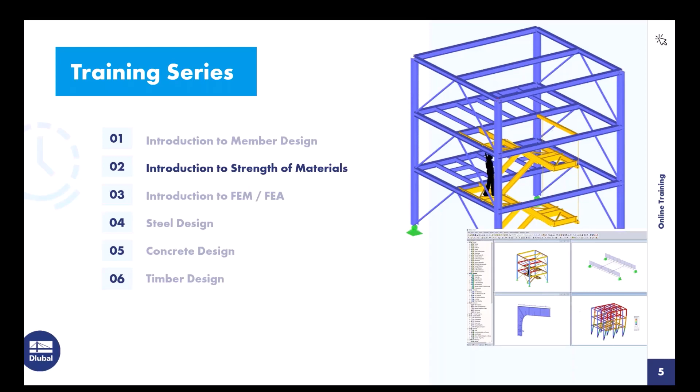This brings me to today's training program. I will first give you an introduction to the RSECTION program. Using several examples, I would like to show you the modeling options and design methods in the program. On the first example, a thin-walled I-profile is modeled with graphic functions.

I will model this slowly so that you can enter this cross-section as well. In another example, I show how to insert cross-sections from the database and how you can add other parts to these cross-sections. Then I show the modeling of a massive cross-section based on a DXF template. Finally, I model a hybrid cross-section.

First, I start a survey to find out whether strengths of materials has already been covered in your studies. I ask you to answer this now.

Okay, most of you have already got info about strengths of materials. Then I would ask you to answer the following survey.

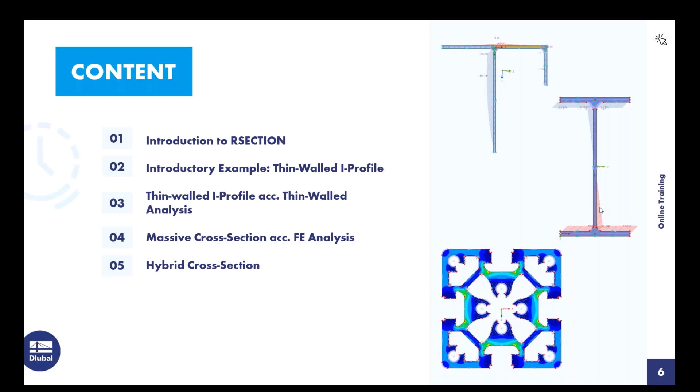If you are working with two screens, I will adjust my pace accordingly. Okay, most of you have two screens. I will then begin with the first example.

RSECTION is an independently executable program for generating any thin-walled or massive profiles. If you want to design special profiles in RFEM or RSTAB that are not contained in the profile library, you can create them with RSECTION. You can then import these user-defined profiles into RFEM or RSTAB.

In RSECTION, it's possible to calculate cross-section values and stresses. The RSECTION user interface is the same as in RFEM 6 or RSTAB 9. The cross-section graphics and dialogues are displayed in the working window. Most tasks can be performed with a mouse; in the tables below, the keyboard is primarily used for numeric input and output of results.

There are 3 navigators in the left pane of the working window: the navigator data, navigator display, and navigator results. The data navigator manages the input data. A double click on an entry opens the dialog. Here, if I double click on the points, the dialog will open, and then I can modify this point.

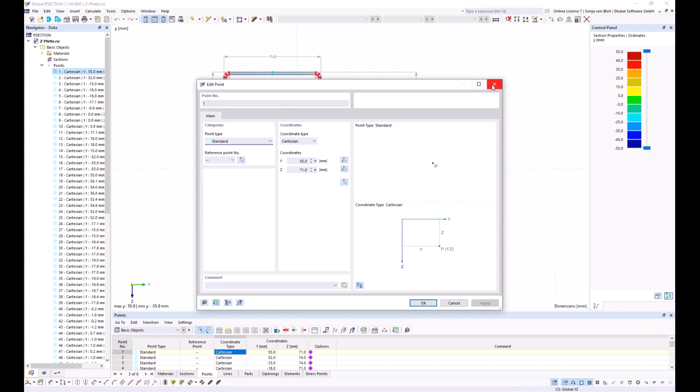It's also possible to open the dialogs for creating new objects. If I go to points, then it's possible to add a new point here.

The display navigator, I will turn to this, controls the graphical display in the working window. If the checkbox in front of an entry is unchecked, this object is hidden in the graphic. If I uncheck the points here, you see in the graphic the points aren't displayed anymore.

The result navigator controls which results are displayed. You can change here between statical moments, unit stresses, and so on.

Then I would like to go into the mouse functions. To move the section, you can hold down the mouse wheel and move the section accordingly. You can turn the mouse wheel to zoom in or zoom out, and right-click opens the context menu.

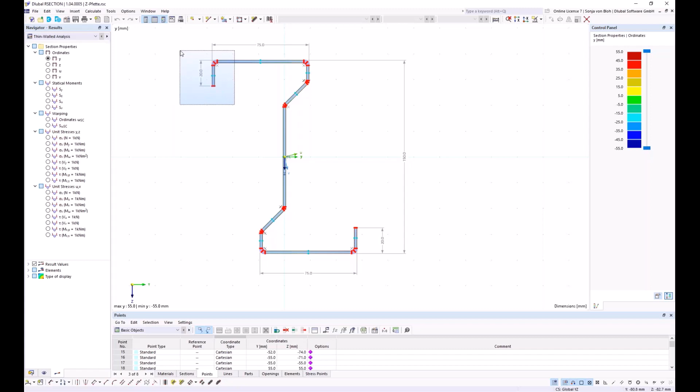If you drag a window from right to left, everything that is intersected by the selection area will be selected. You can also select individual objects. To do this, left-click on an object. To add objects to the selection, hold down the Control key and left-click on the next object. To remove objects from the selection, hold down the Shift key and click on the object to deselect.

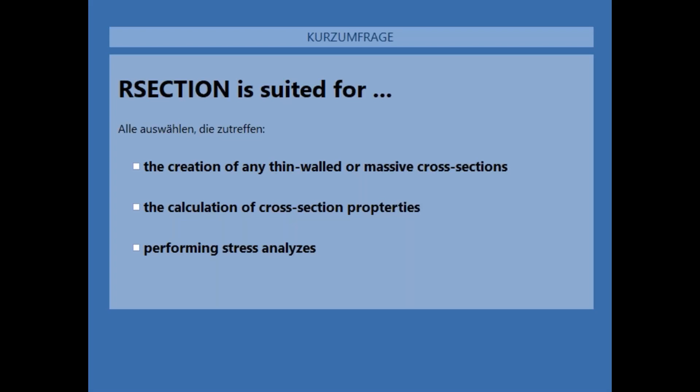All answers are correct. RSECTION is suited for the creation of any thin-walled or massive cross-section, and also for the calculation of cross-section properties and stresses.

This brings me to the first example. To create a custom cross-section, I open the new model window via this button here, and then I have to give the model a name. I name it here example 1.

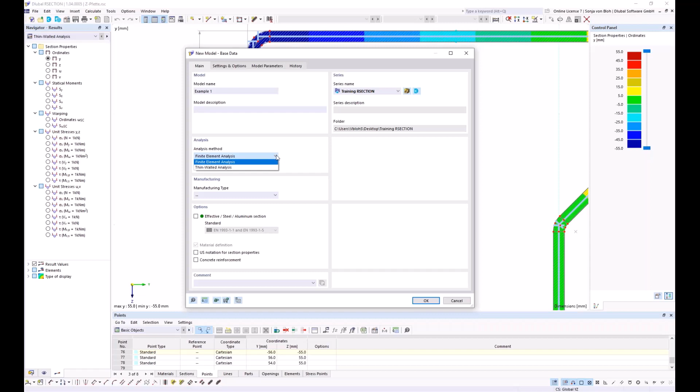Furthermore, the analysis method must be defined. This is here in this chapter, and the following analysis methods are available: the finite element analysis and the thin-walled analysis.

The effective cross-section can be calculated for both analysis methods after activating the extension here under the options. A standard must be selected according to whose rules the individual parts or subpanels are to be generated, and the effective cross-section is to be calculated.

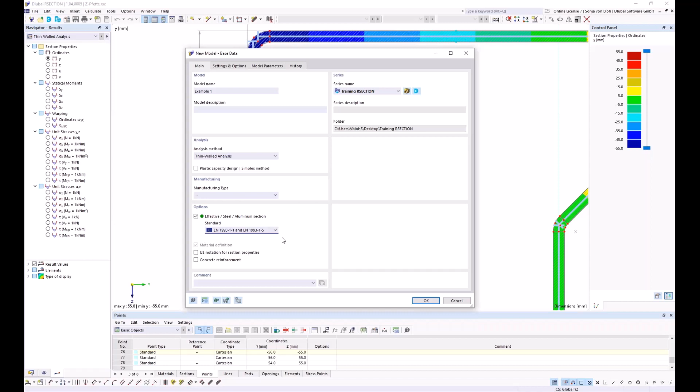The following standards are currently available: the Eurocode 3 Part 1.1 for steel sections, the Eurocode 3 Part 1.3 for cold formed sections, and the Eurocode 9 for aluminum sections. I choose here the Eurocode 3 Part 1.1, and then I click on OK.

The selection of the design method or the standard is irrelevant when using the RSECTION cross-section in RFEM or RSTAB. You can select the design method in RFEM or RSTAB regardless of what is set in RSECTION.

Furthermore, the subpanels are generated in the design modules based on the standard selected in the design add-on. In the steel design add-on, the manufacturing type determines which part of the standard is used for the design. For cold formed cross sections, the standard Eurocode 3 Part 1.3 is used, and for hot rolled or welded sections, the standard Eurocode 3 Part 1.1 is used.

Now the file is created. I first define the material, and for this, I open the Edit Material window. I can create or copy another material on the list via this button. This creates a new material, and this copies the selected material.

I can enter a material name here directly. RSECTION then lists all materials that match that name. If I enter here S235, then RSECTION lists all materials with that name that are within this database.

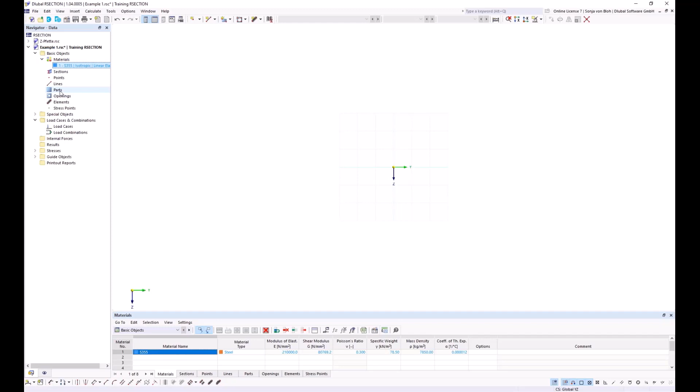Elements can be created graphically or via a dialog. The graphical input is called up via the symbol here in the toolbar, and the input via dialog is called up via the navigator data. If I go here, I can create a new element via the dialog.

When creating an element with a graphical input, the points are also created. When creating an element via the dialog box, the parts and the points of the element must be created beforehand. This is why it's not possible here to call up this dialog, because I haven't created the points before.

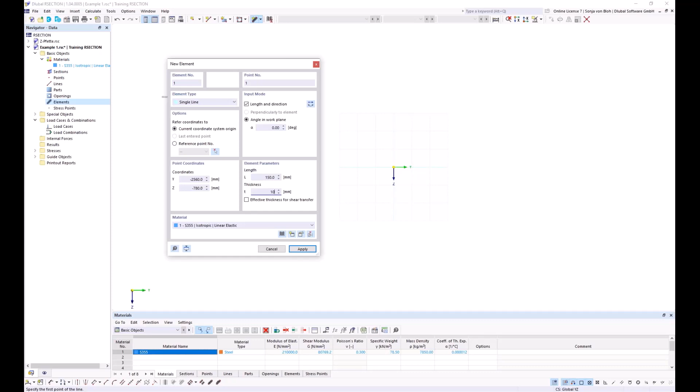I enter here the element graphically, so I use this function single line, and I enter the bottom flange here first. I choose the input mode, length and direction, and I choose an angle on the work plane of 0 degrees, and I define for the flange a length of 150 millimeters and a thickness of 10.7 millimeters. Then I left click here on the working window.

Then I create the web. Elements must be connected for the calculation of the effective cross-section. The connection is to be made via the start and end points of the elements. If two elements share the same points, they are connected.

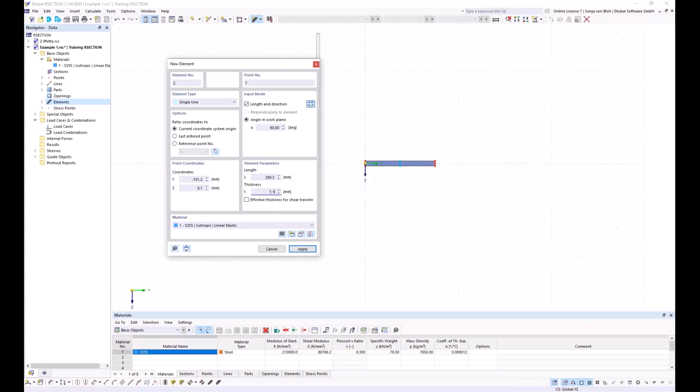For the web, I use also the input mode, length, and direction. Here I define an angle in the work plane about 90 degrees, and I change the direction, and then I define the length of 289.3 millimeter and a thickness of 7.1 millimeter. And then...

I create this web. Then I create the left flange, and for this I use also the input mode, length, and direction. Here I change the angle on the work plane. It's 0 degree. I change the length to 75 millimeter and the thickness to 10.7 millimeter.

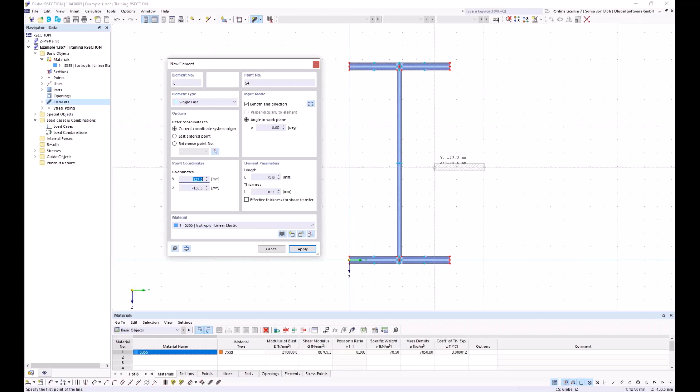Now I have to create the flange on the right side. For this, I reverse the direction, and then I create this element. I now click on the right mouse button. This closes my window. The profile should be a rolled T profile to which a lower flange is welded.

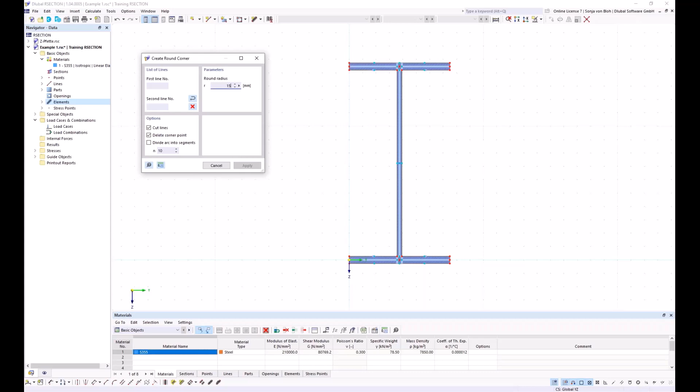The round radius is 15 millimeter. I can define lines to create them or use the create round corner function. I find this function here below, and in this dialog I have to define the round radius. This should be 15 millimeters, and then I have to click on the corresponding lines. And then I click on the right mouse button to close this window.

The lower flange is welded with a 6 millimeter double fillet weld. I create the welds using the create angled corner function. I find this here. I have two corner types: both edges, where I can define the length of the edges, or corner type edge and angle, where I can define just one length and an angle. You can also calculate in the dialog. So I define 6 multiplied by the square root of 2, and I define an angle about 45 degree, and then I click on the corresponding lines.

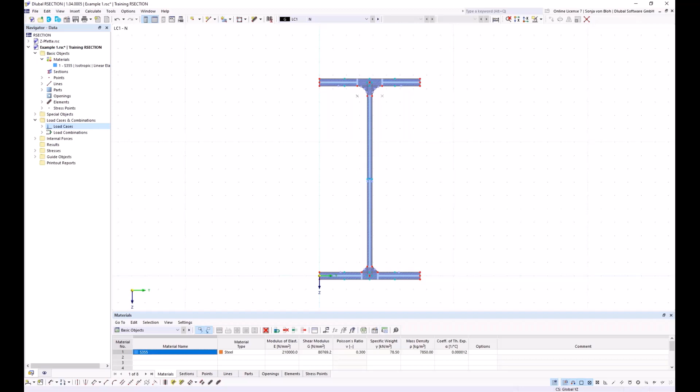Then I have to define the internal forces. The internal forces can be defined manually or imported from RStab or RFEM. If you want to use the import function, then you can do this via this table, internal forces, and then you can click on this button here, import internal forces from RFEM or RStab.

I want to define the internal forces manually. For this, I go to the navigator data, and here I open the tree internal forces, and then I double click on internal forces, and I want to define a compressive force. Compressive forces are negative, tensile forces are positive. Therefore, for a compressive force, I define here minus 10 kilonewton.

Then I click on apply and next, and I change the load case to load case 2. And here I want to define an axial force about 0 and a bending moment my about 100 kilonewton meter.

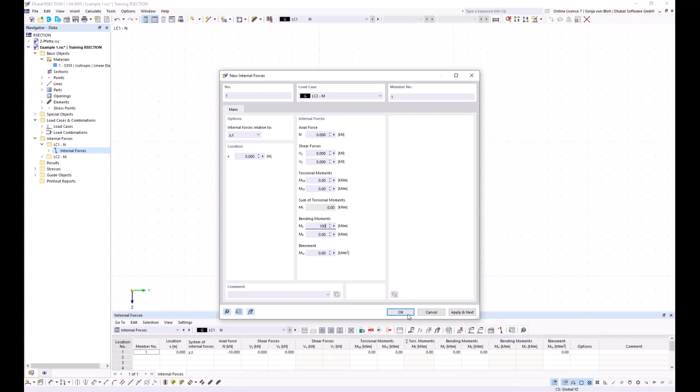And I click here on OK.

The blue dots that you can see here on the graphic are the stress points. Stresses are calculated and displayed at the stress points. The stress points are generated automatically, but they can also be defined manually. I want to do that here.

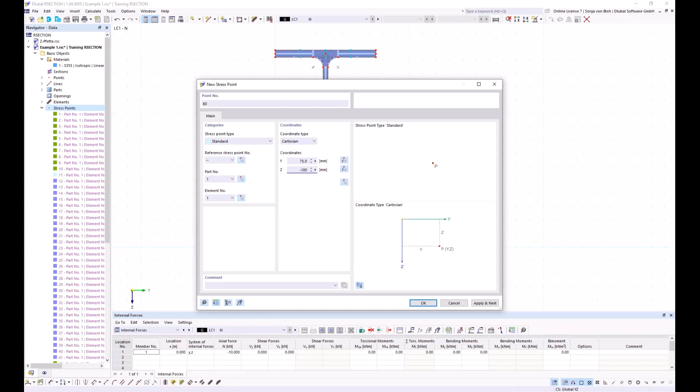So I go here to the navigator data again. I find here the three stress points, right click on it, and define a new stress point. It's possible to define the coordinates manually, or select a point in the graphic and import its coordinates. I define here for the y direction 75 millimeters, and for the z direction minus 100 millimeters, then click on OK. This stress point is now created.

If I want to find it, I can right click on the stress point in the navigator data and use this function find, and you see now the stress point is located here.

Which stresses are to be calculated and output in tabular and graphical form can be set in the stress configuration, and you find the stress configuration also in the navigator data, here under stresses, stress configuration. If you double click on it, the corresponding window will open, and via these checkboxes you can check or uncheck the stresses you want to calculate.

Here these stresses are calculated: the total normal stress, the total shear stress, and also the equivalent stress. I don't want to calculate more stresses, so I click on OK.

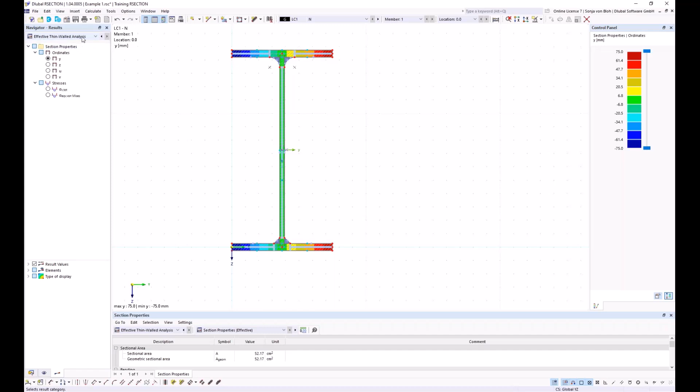In the results navigator, you can switch between the gross cross-section, this is the thin-walled analysis, and the effective cross-section, this is the effective thin-walled analysis. The same is possible in the result tables, where you can also switch between thin-walled analysis and effective thin-walled analysis.

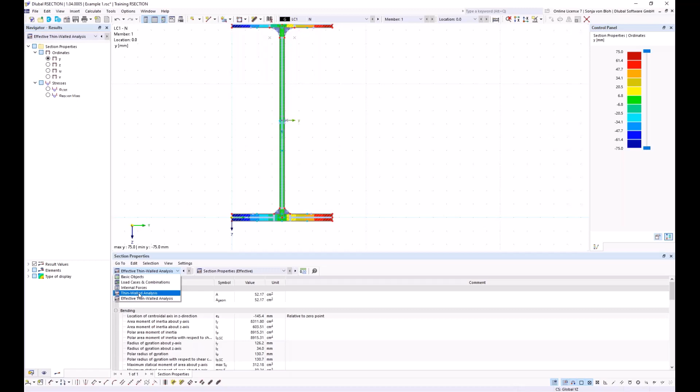Furthermore, you can switch between the results of the individual load cases, and you can also display the stresses. Now the stresses sigma x total are shown for load case number 1. If you want to see the stresses for load case 2, you have to choose that load case here.

I first look at the results of the gross cross-section of load case one. The display type can also be set on the results navigator, where you can change the type of display. I change here, I choose off.

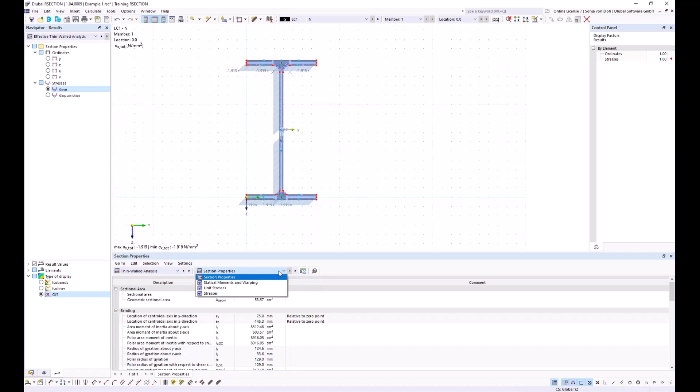I can see the cross-section values here for the gross cross-section. If I choose thin-walled analysis, then you can see the section properties. The section area is calculated, along with the area moment of inertia about the y and z axis, and so on.

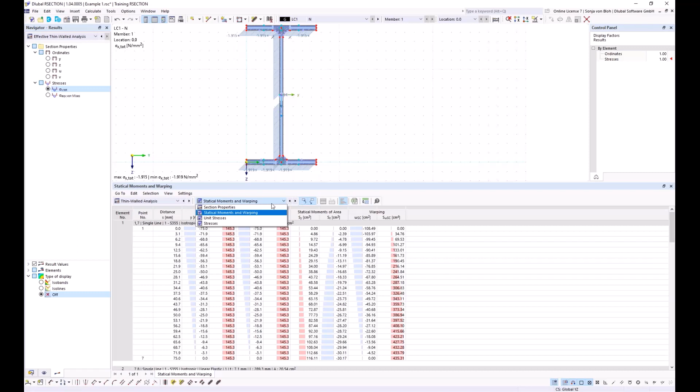You can also see here in the tables the statical moments, and it's possible to see the calculated stresses numerically. It's also possible to show these results graphically. You can see here the statical moments, and also the stresses on the gross section.

If I now want to display the stresses at a specific stress point, I have to switch here to the tab All Stresses by Stress Points. If I choose this stress point that I created manually, the results of the stress point are displayed here in the table.

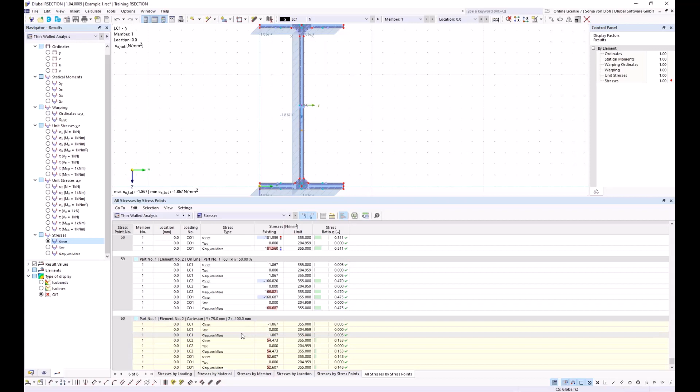In the case of the results of the effective cross-section, in addition to the results of the gross cross-section, there are also outputs for the classification of the cross-section and the effective width of the cross-section.

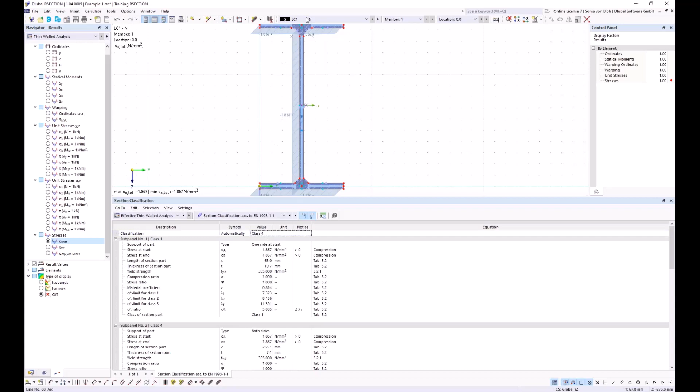I choose here the effective thin wall analysis. I have the section properties of the effective cross-section, and here the section classification. I see that the section falls into class 4 for this load case, axial force.

Local buckling occurs in class 4 cross-sections. According to the standard, the reduction in strength due to local buckling can be taken into account through effective widths, and you can see this here in the graphic.

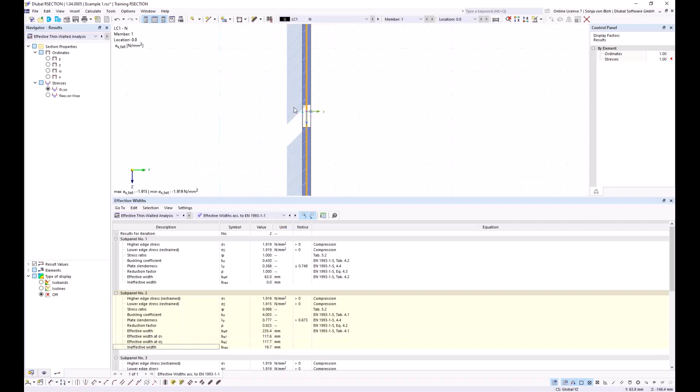If I change here to effective thin-walled cross section, the web falls into class 4, and therefore the effective widths are calculated. Here an ineffective width of about 19.7 millimeters is calculated, and you can see this reduction graphically.

It's also possible to look at the results of load case 2. Then you can see that for load case 2, this cross-section falls into class 1, so no reduction is made.

I'm now starting a survey again regarding the requirements for cross-section classification. I start this; multiple selection is also possible.

Okay, I close the survey and then I share the results.

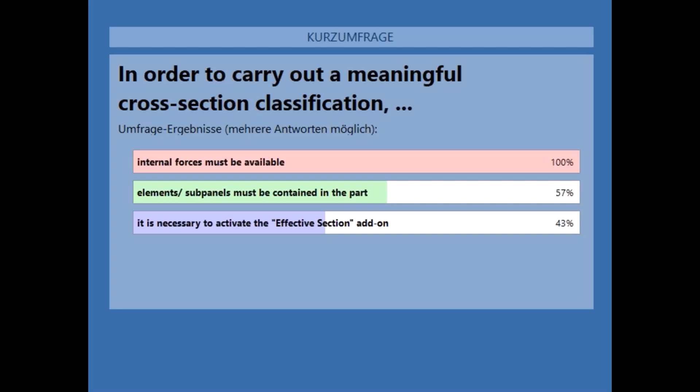All answers are correct. For a classification, internal forces must be defined, elements must be defined, and it's necessary to activate the effective section add-on.

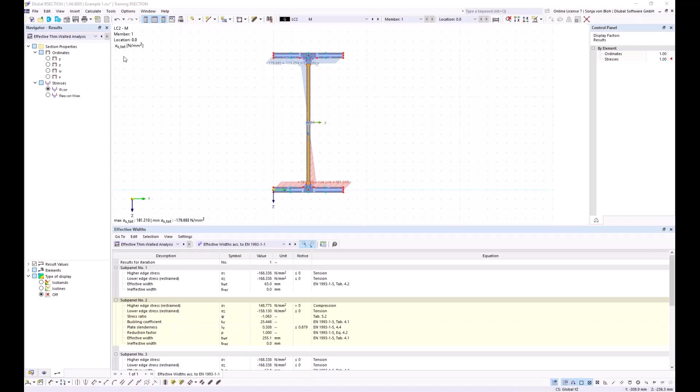I would now like to use another example to show you how you can access cross-sections from the library and modify them. For this, I create a new file. I click here on this button, New File, and I name it Example 2. I choose here the analysis method, thin-walled analysis, and I want to calculate also the effective cross-section, so I activate this checkbox again, and I choose here the Eurocode 3 part 1-1. Then I click on OK. Then I define the material.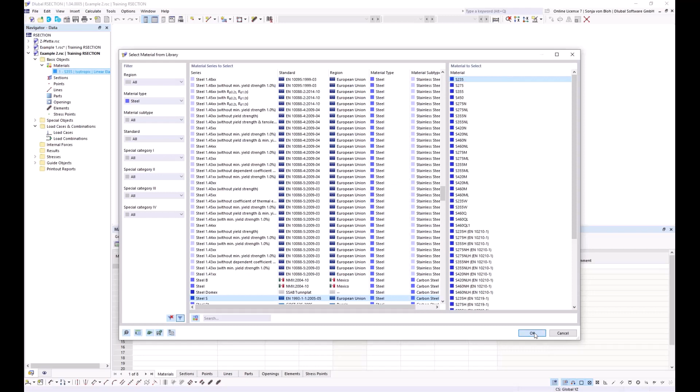For this, I double-click on the material and I open the material database. And here I choose this S235. And here I click on OK. And now this material is defined.

Then I insert a cross-section from the cross-section library. To do this, I open here the New Section window in the data navigator. The window is structured like the material window. A cross-section can be created or copied via the list here. You can create a new section or you can copy selected sections.

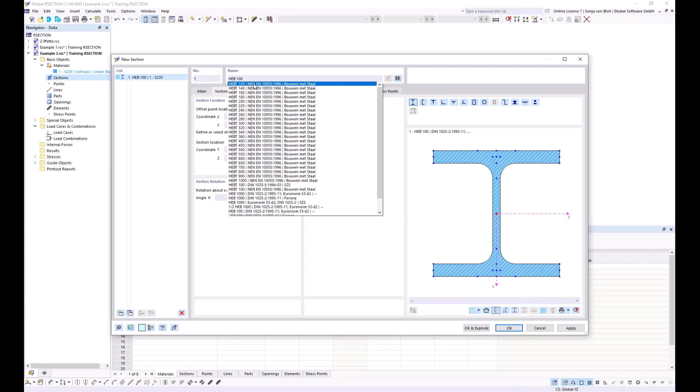I can also enter the name directly here, maybe HEB 100, and then you can see here all cross-sections with that name in the cross-section library. I can also open the cross-section library via this button here. A large number of cross-sections have already been entered into the cross-section library. I choose here standardized L cross-section. And in the cross-section library, like in the material library, I have filters here on the left or a search to quickly find the cross-section.

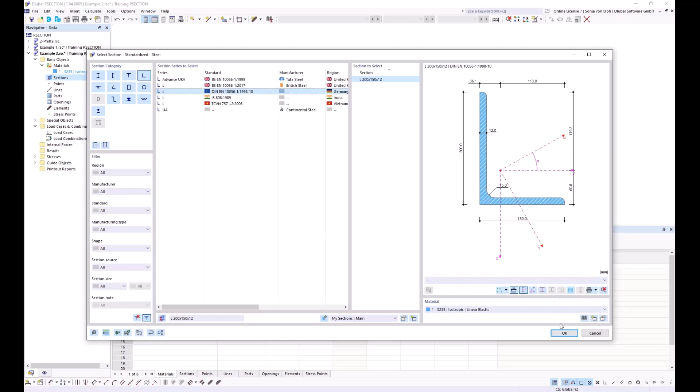I choose here an angle L 200 x 150 x 12, and I choose here this standard from DIN, and then I click here on OK.

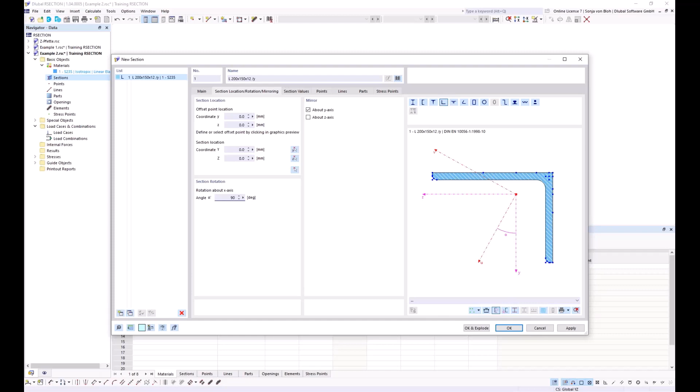The angle should be mirrored around the y-axis. That's why I activate this checkbox, and the angle should be also rotated about the x-axis about 90 degrees, so I define here 90 degrees. Furthermore, I select the offset point in the graphic, and here I select this point, and at this point the cross-section is placed at the insertion point that you can enter here. You can enter it manually, or it's also possible to pick the location in the working window. And I pick here this location, and then I click on OK.

When inserting this thin-walled cross-section, two elements are created, and also the corresponding part. The cross-section can be subsequently edited. If I double-click here, this opens the Edit Section dialog where I can change or modify here the offset point locations and so on. And it's also possible to move this cross-section or to rotate this cross-section via this function here.

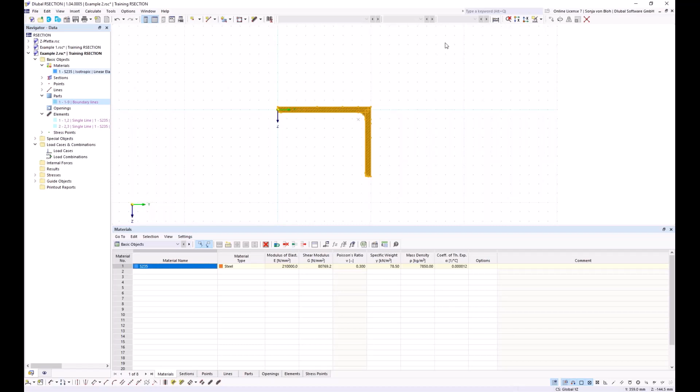However, in order to modify individual objects such as points or lines, the cross-section must be split. The cross-section is to be supplemented by further cross-section parts. I therefore split the cross-section into its individual parts, and I can do this by right-clicking on the section, and then I choose here this function explode.

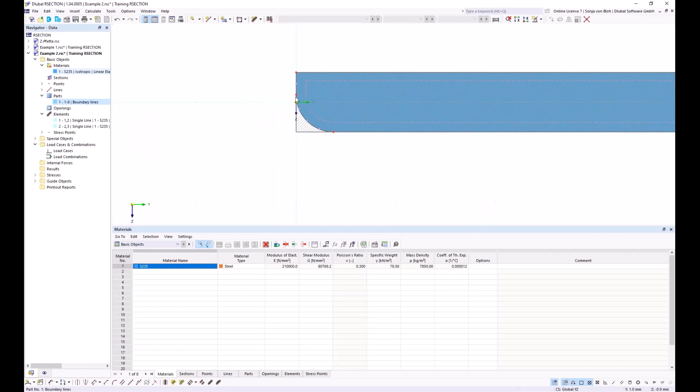The fillet isn't needed, so I will delete that. I delete this point, and now the part is deleted too. Here you can see the elements are colored in red, and this means there's an error for this element. The elements must lie in a part. The part is deleted, so here's an error, but I will create this part later.

I will now add more elements, and I will do this via the graphical input. So I select here a single element, and I use also the input mode length and direction. Angle in the work plane is 0 degrees, and I define here a length of 200 millimeters and a thickness of 12 millimeters. Now the direction must be changed, so I click here on reverse orientation, and then I click here on this point. Another element for the web should be created.

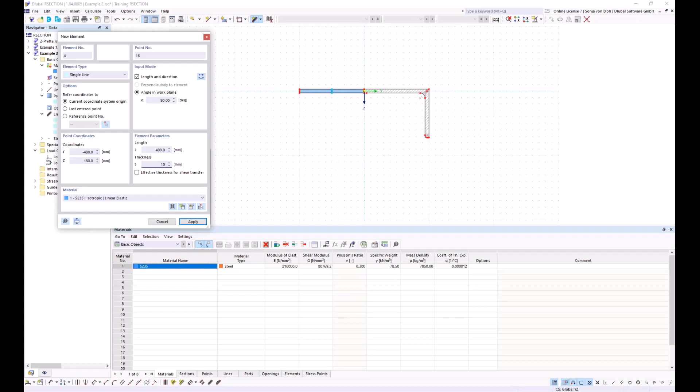To do this, I use also the input mode length and direction. Here I define an angle of 90 degrees, and I have to reverse the orientation, and the length should be 400 millimeters and the thickness 10 millimeters. And then I click here on this point.

I delete unnecessary lines. For this, I click with my left mouse button on this line, and then I click on delete. And I will do this with this line also. I select it, then I click on delete.

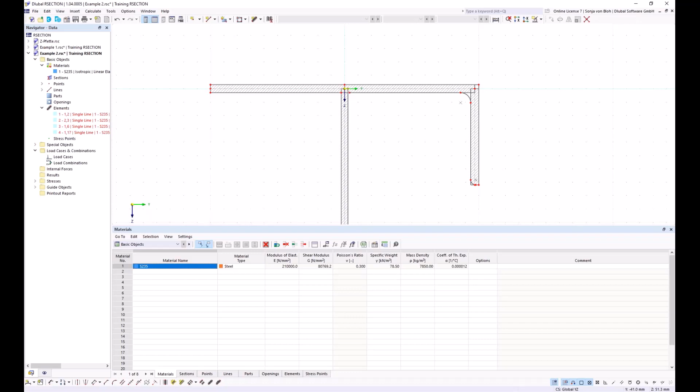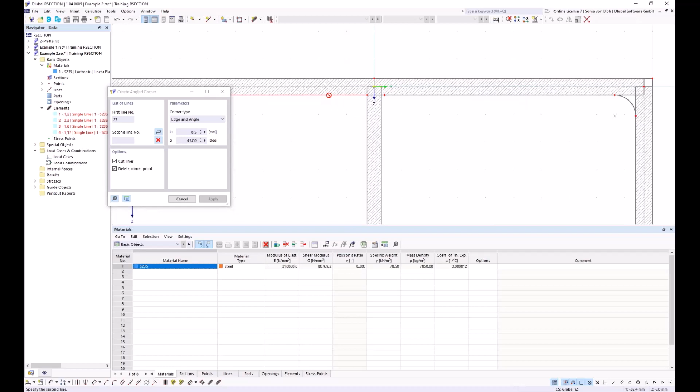Welding seams should be also taken into account in the cross-section properties. I create the weld using the angled corner function. So I open this dialog again. I choose the corner type, edge and angle, and a 6 millimeter double fillet weld is to be defined, so I define here 6 multiplied by square root of 2, and I define here an angle of about 45 degrees, and then I click on the corresponding lines.

Furthermore, I still have to create the part, and I will do this using a function I can find here: select boundary. For the new part, I have to define a material. This should be the created material, S235. I click OK, then click on a line, and now the part is created. The cross section is now complete.

I would now like to calculate the effective cross section and the stresses, so I create load cases and internal forces. I create the load cases first. For this, I go to the navigator data and choose new load case. I name this load case N, and I create another load case via this button, create new load case, and I name this load case M.

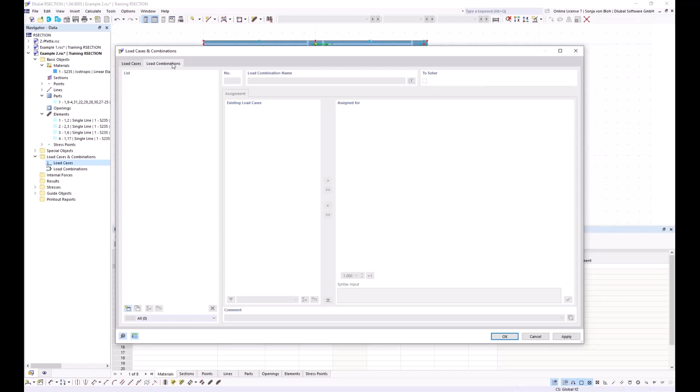I also create a load combination. For this, I go to the tab load combinations, and I click on this button here, create new load combination, and then I add all load cases to my load combination. Then I click on OK.

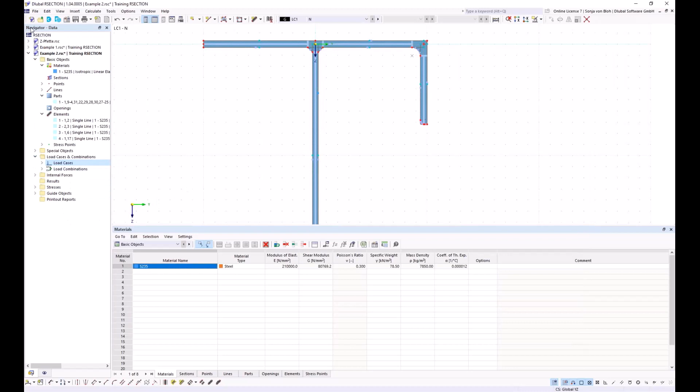Then I have to define the internal forces. To do this, I go to the navigator data, open internal forces, and I define here an axial force of minus 50 kilonewton. I click on apply and next. I change the load case to load case 2. I define here an axial force of 0 kilonewton and a bending moment of 20 kilonewton meter. And then I click on OK.

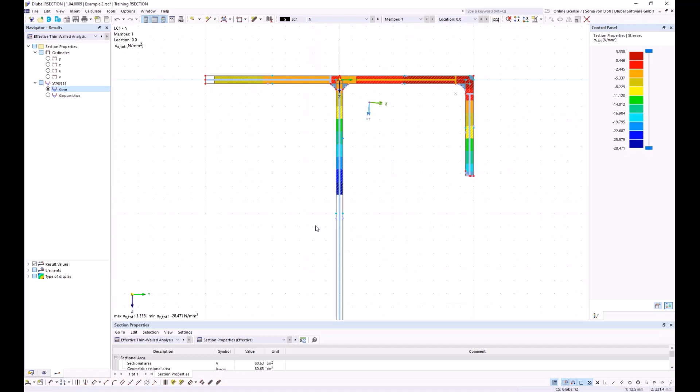Then I start the calculation. I choose calculate all, and I look at my effective cross-section. This cross-section falls in load case 1, also in class 4. I can see here the reduction, and I can see the reduction also in the tables. I can see the section classification, class 4, and the effective width here for this sub-panel.

I also want to create a printout report, and I will do this via the navigator data, where you find printout reports below. Then I click on new printout report, and I have to check the report items that I want to add into my printout report. I don't want to see the stresses by material, by member, or location and stress points. Then I click on Save and Show. Now the printout report will be created.

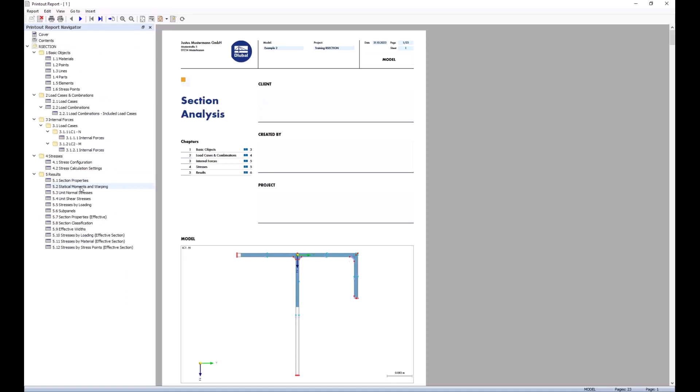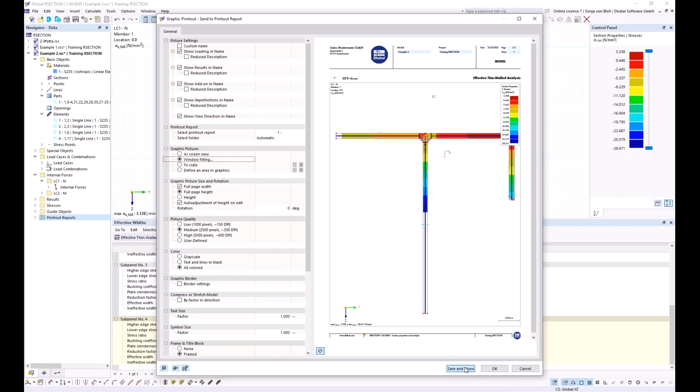I can see here the numerical results. It's also possible to add graphics to the printout report. To do this, I hide this printout report and use this function, print graphics to the printout report. In this window, it's possible to define the size of the graphic. Here I choose window filling. I can see now the preview, and if it's okay, I click on Save and Show. Now this graphic is added to the printout report.

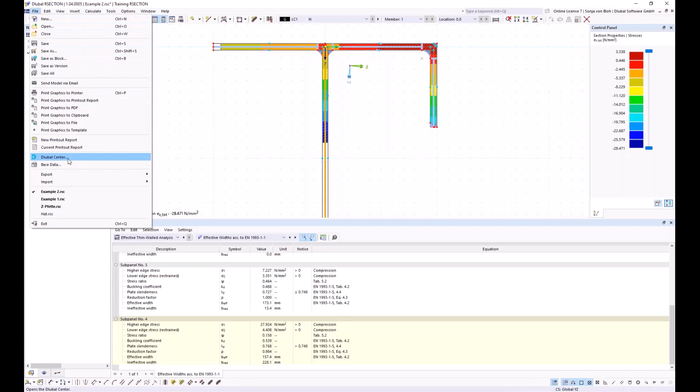In the next example, I would like to show you that you can also create cross-sections by importing a DXF file. A DXF file can be imported via menu File, Import DXF. Then I have to choose the corresponding DXF file, and I click here on Open.

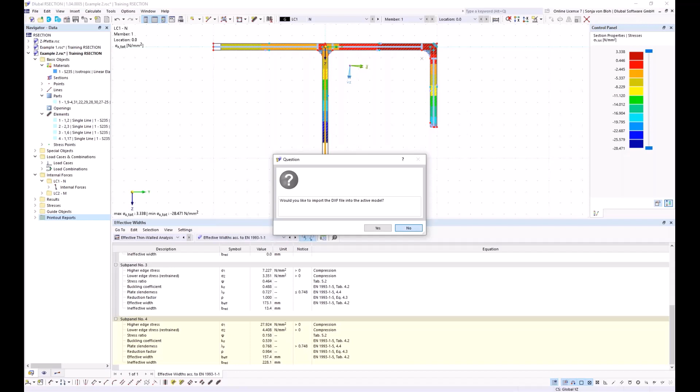I don't want to import the DXF file into the active model. I want to create a new one, so I click on No. Then a new window opens. In the section Create a Section Model, you have 3 options for creating the cross-section.

The automatic creation of elements is useful if the outlines of the cross-sections are available in the DXF file. RSECTION attempts to create center lines for parallel lines and then set the elements between the intersections. Only elements that do not exceed the maximum thickness that you can define here are created.

The import function, use DXF template lines as center lines, is useful if the cross-section geometry is available as a center line model. The lines of the DXF template are considered as the center lines of the elements. The thickness defined in the field T is assigned equally to all elements.

The function create DXF template is useful for massive cross-sections where no elements need to be created. In addition, this function can also be used for complex cross-sections where I only want to create elements for the decisive cross-section parts. With this import function, the lines in the DXF file are imported as lines.

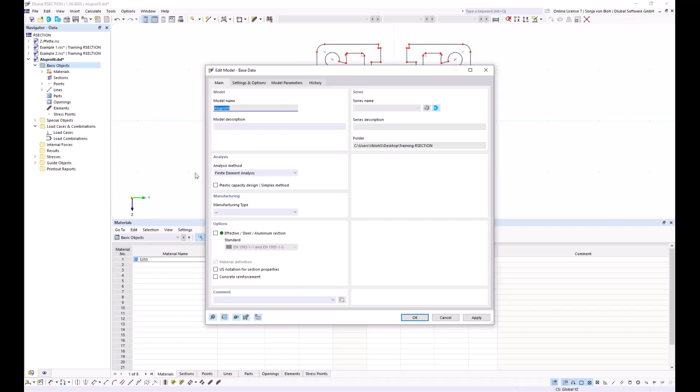A finite element analysis is to be carried out. To do this, I go to the base data and choose the analysis method, finite element analysis. This should be performed on massive cross-sections, such as timber or concrete cross-sections, in contrast to thin-walled cross-sections, where stresses can be regarded as constant across the thickness. The stress distribution in solid cross-sections is variable and can only be determined with a finite element analysis. So I choose this analysis method now, and click on OK.

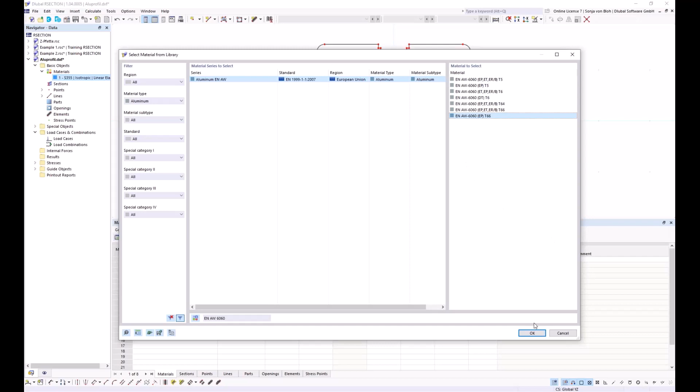Then I have to define the material. I modify the created material, which should be an aluminum material. I open the material library, change the filter to aluminum, use the search function, and define a material EN AW-6060. I choose this material at the bottom, and click on OK.

In a finite element analysis, only a surface needs to be defined, meaning only the part needs to be defined, but no elements. I would only need to define elements if I also want to calculate the effective cross-section or carry out a classification. So I only create the part here, using the function select boundary. I click on OK, then click on a boundary line, and now the part is created.

I still need to create the openings. I create the openings using a function I find here, select boundary, then click on the boundary. I can create the other openings by rotating them.

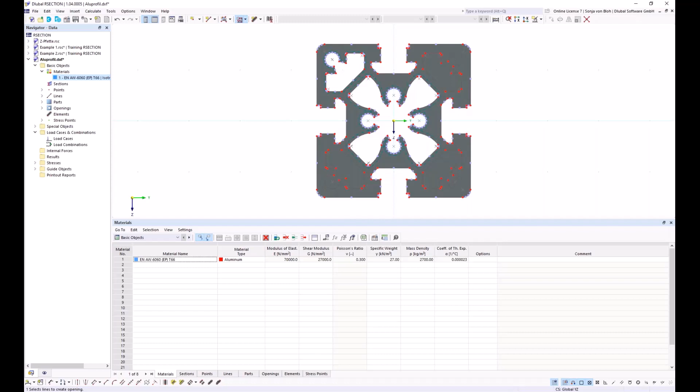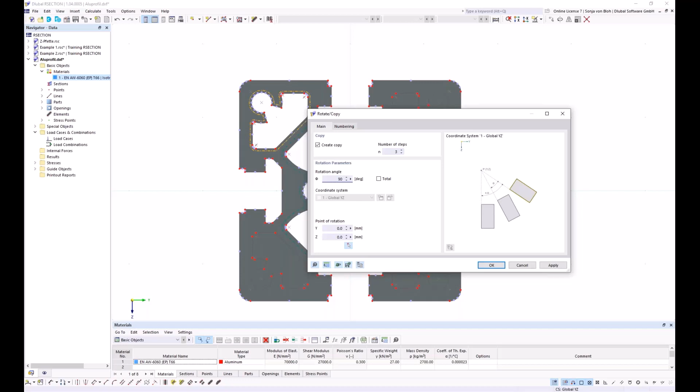I want to show you this as well. First I have to select the opening that I want to rotate, then select the function rotate selected objects. I want to create a copy, and I want to create 3 copies, so I define here a number of steps of 3, and the rotation angle should be 90 degrees. Then I have to define the point of rotation, which I can also pick in the window. If I click on OK, the openings will be created.

I want to calculate the stresses here as well, so I create load cases. For this, I go to the navigator data again, right click and choose new load case. I define a load case N, and also a load case MT. Then I click on OK.

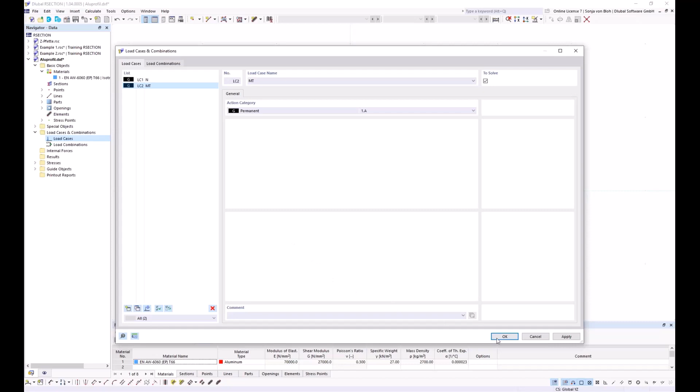Then I define the internal forces, again via the navigator data. I open the internal forces dialog and define an axial force of minus 10 kilonewton in load case 1. Click on apply and next. Then I go to load case 2, and define a torsional moment of 0.3 kilonewton meter. Click on OK.

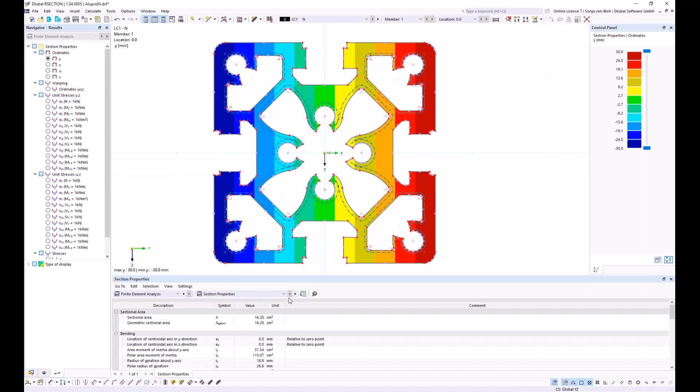Then I start the calculation via the menu calculate all, and now the finite element analysis is carried out. I have the section properties and stresses in tabular form, and I can also see the stresses graphically. If I choose, for example, sigma x or tau total, I have to change to load case number 2, and you see the results graphically.

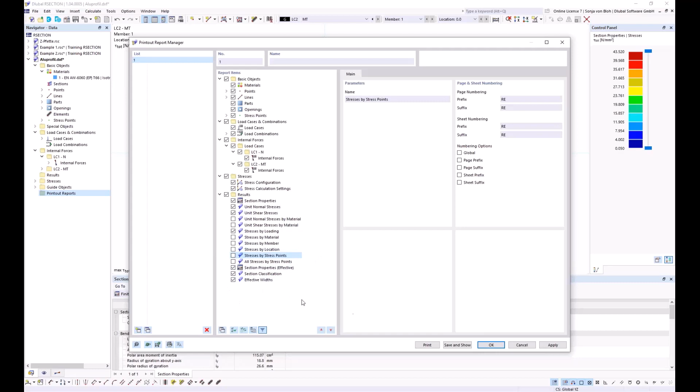I want to create a printout report for this as well. I go to navigator data again, right click on printout report, and choose new printout report. Here I choose the report items. I don't want to see the stresses by material, member, location, stress points, and so on. Then I click on Save and Show, and the printout report is generated.

I want to also add a graphic to this printout report. I go to the function print graphics to printout report, which should be window filling. Then I click on Save and Show, and now this graphic is also added to the printout report.

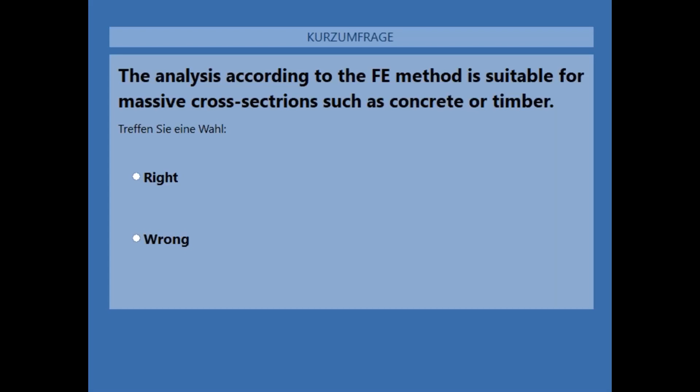Nearly all of you have answered this question, so I'll share the results. The correct answer is that the finite element method is suitable for the calculation of massive cross-sections. Most of you gave the correct answer.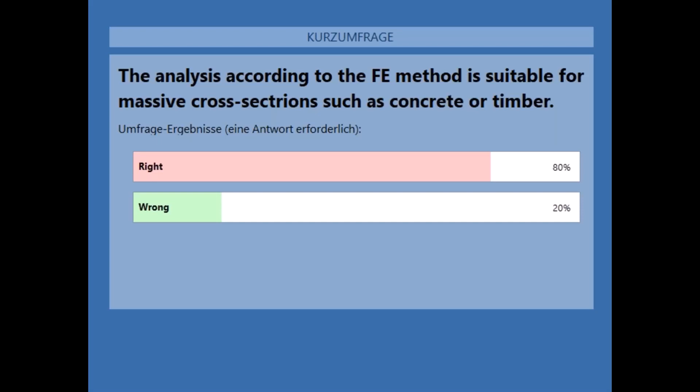As a last example, I show the modeling of a composite cross-section. In our software, it's also possible to model cross-sections that consist of different materials. Ideal cross-section values are determined for such a cross-section. A 1000 millimeter wide and 200 millimeter high concrete cross-section lying on an HEB steel cross-section is modeled in this example. For this, I create a new file and name it example 4. I choose the analysis method finite element analysis, and then click OK.

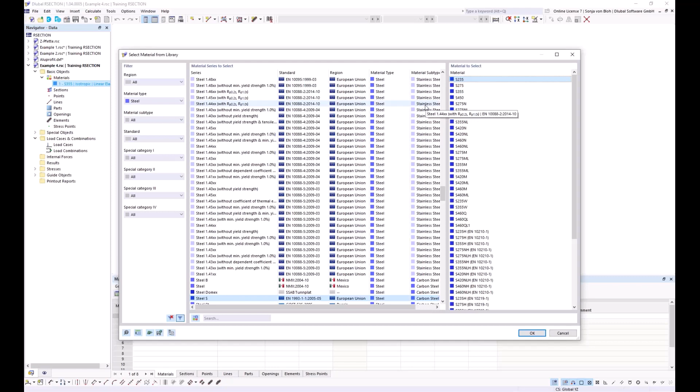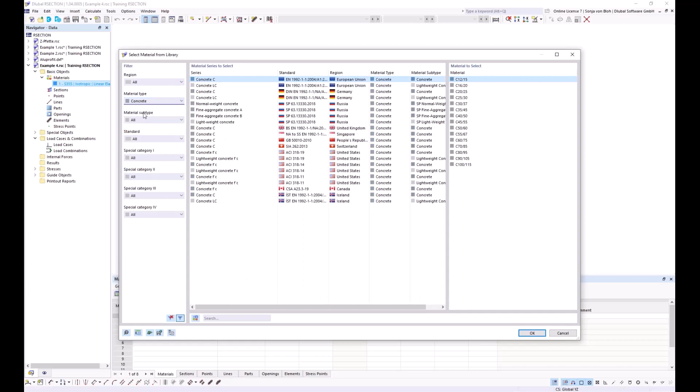I define two materials. For this, I open the material window, and for the first material, I define a steel material. This should be an S235. I open the material library and choose the S235 material, and add a new material, a second material, to the list. I do this via this button, create new material. Then I open the material library again, choose the material type concrete, and choose here C35/45 - oh no, I want to choose a C40/50 material instead. Then I click OK, and also OK.

The first material is always the reference material. In RStab or RFEM, however, I have the option of defining other materials.

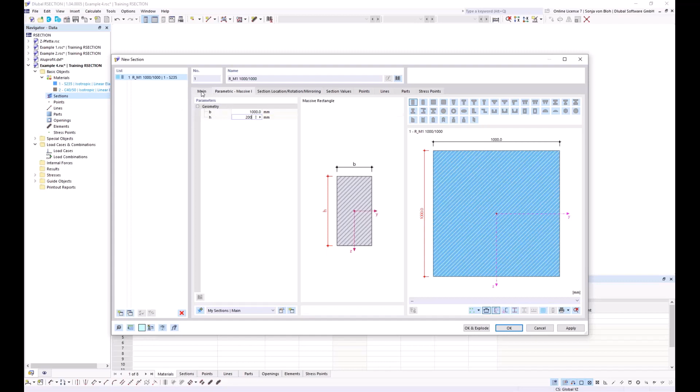First, I model the concrete cross-section with a dimension of 1000 to 200 millimeter, and I'll do this via section. So I go to Navigator Data, New Section. Then I open the section library and choose a massive rectangle cross-section. I define for B 1000 millimeter, and for H 200 millimeter, and I define a material, the concrete material, for this. Then I click on OK.

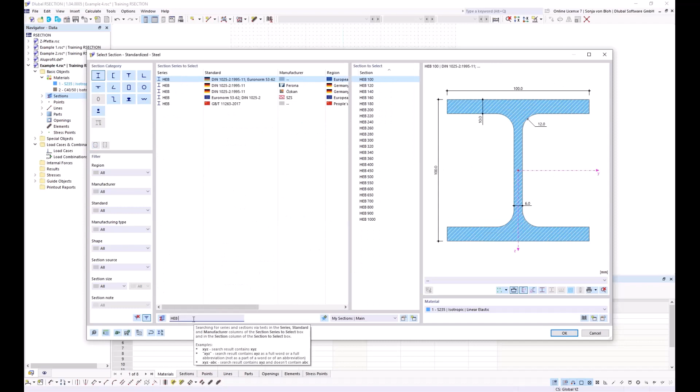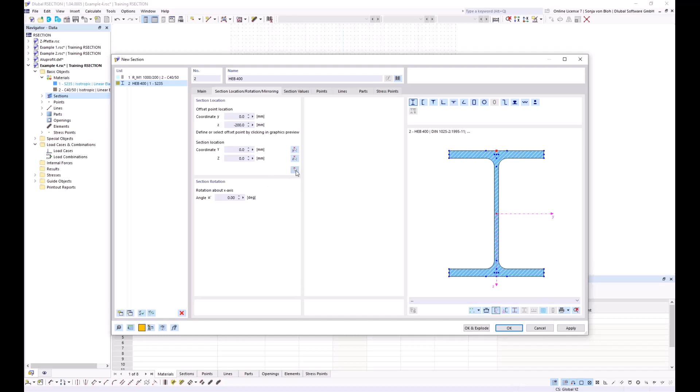Now this cross-section is inserted into the file, and I create a second cross-section. For this, I go to Navigator Data again, New Section. This should be the steel cross-section. I open the section library again, choose I-beams, H-beams, and define an HEB of 400. I choose this one, choose the material S235, click OK, and choose the center of the top flange as the offset point. So I click here on this point in the graphics, and choose the section location, here the bottom of the concrete rectangle. Then I click OK.

I want to calculate also the stresses, and for this I create a new load case. So I go to Navigator Data, new load case, and define the load case name M. I click OK, and in load case M, I define a bending moment about the y-axis of 100 kilonewton meter. I now start the calculation.

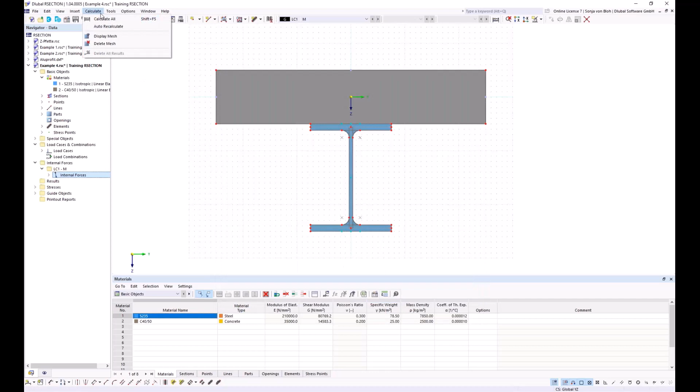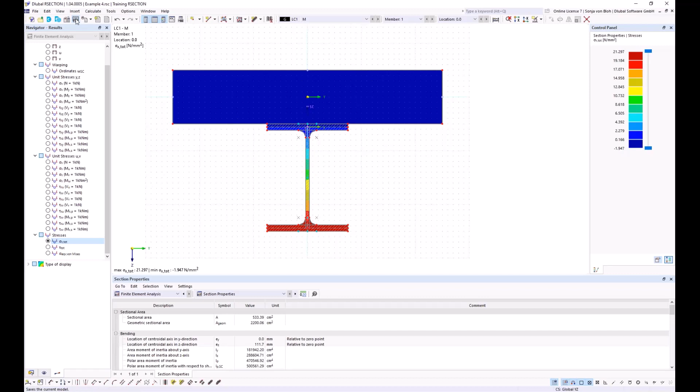I can see here now the stresses, and I would also like to show you how to import the cross-section into RFEM. To do this, I first save the cross-section, and now open RFEM 6, and create here a new file. I name it Example 1, and then click OK. Then the new file will be created.

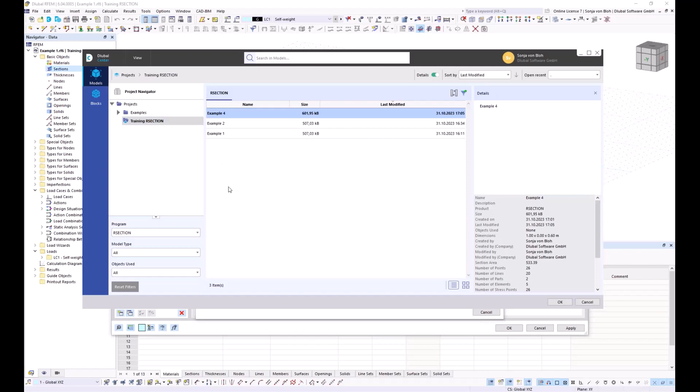I import the RSECTION cross-section into this file first. For this, I go to Navigator Data, right-click on Sections, New Section, and open the section library. Here I have the possibility to import a section from our section library. I click on this button, and this opens the Dlubal Center. In the Dlubal Center, I choose this example 4, and click OK. Now this cross-section is available in RFEM 6.

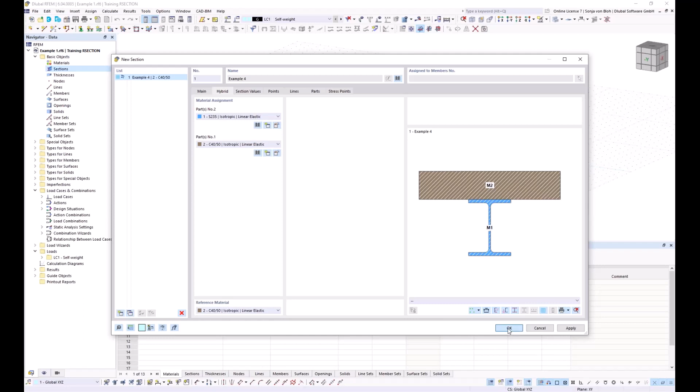I have here also the tab Hybrid, and here you can see the material assignment. If you want to, you can also change the materials here for parts 1 and 2, and it's also possible to change the reference material. It's also possible to create a member with this cross-section. To do this, I click on New Single Member, then in Tab Section I choose this cross-section, this is my example 4, and then I create this member.

With this example, I have come to the end of the training. It was taught how you can create general cross-sections with graphic functions, how you can add cross-section parts to database profiles and create profiles based on a DXF import, and also how to create hybrid cross-sections.

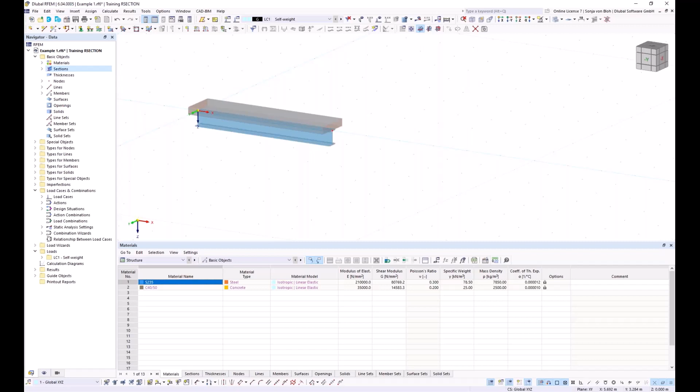Finally, I would like to show you where you can find more information on our website. You will find in tab Support and Learning frequently asked questions. You can find here also knowledge base articles on news and events, and you can find our webinars.